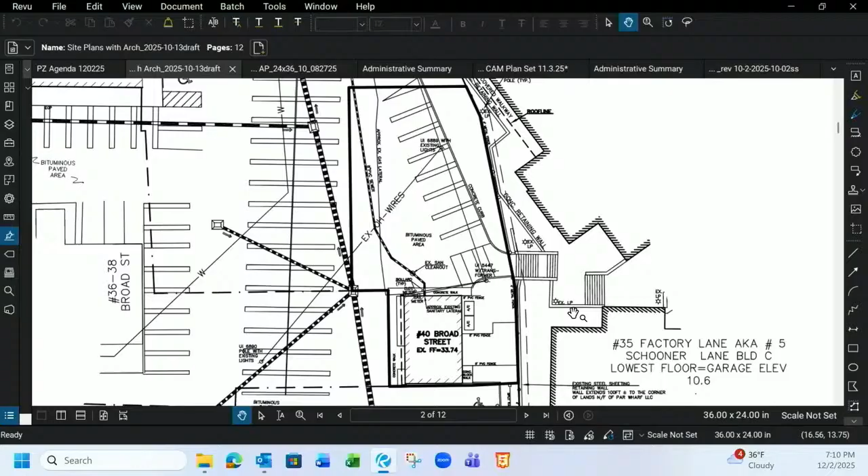So that's the sum of it, and happy to answer any questions. We did submit a request to have this brought onto your agenda tonight. David did put onto the agenda the plans, but these will be presented to you under a site plan application that hopefully will come at a later date.

Thank you. Are there any questions by the members of the board? Is the city attorney going to be making any comments on this particular application? If so, I'll let him speak to that. Thank you. Good evening, board.

As Attorney Lynch indicated, we met. If you might just give us your name. Jonathan Berchem, City Attorney, City of Milford.

So we met with Mr. Walls and Attorney Lynch. They showed us these plans. Obviously, the city's interest was the parking spaces remaining. Obviously, we benefited, the public's benefited by the spaces. Anybody that's ever been to Colony or any other of the businesses down there knows that parking's a premium down there, so we didn't want to lose spaces.

As presented by Mr. Walls and Attorney Lynch, obviously there's no loss in spacing. In fact, Attorney Lynch remarked to me they may be more desirable because should this project go forward, they would be covered. So the city's position is that this project seems consistent with MCDD and transit-oriented development, and for these purposes for 8-24, obviously there's no impact other than the period of construction with the municipal parking easement that the city obtained in 1979.

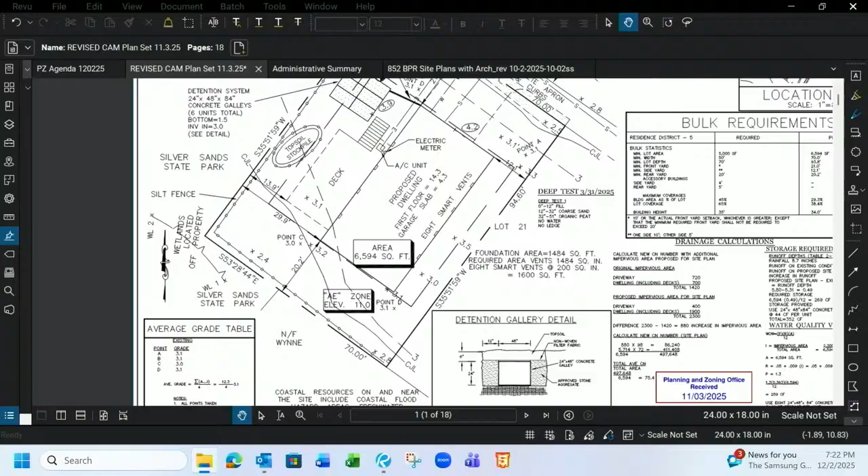We've gone through the process that we've been asked to go through. We went through DEEP, and we have approval from DEEP. We've gone through town engineering, and it seems like everything is in place. If there are any technical questions, I'm here with my builder, Victor Rosado, and Andrew Rosado, and our civil engineer, Fred D'Amico, who put the drawings together.

I'm here to answer any questions you have. Sure, thank you. Are there any questions for the board for Mr. Ruggieri? Mr. Hirsch? All right, I always ask this in these type of applications.

What structure, if any, is currently on the property? It's empty, there's nothing. The house is already knocked down? The house was taken down a year ago, October. We had a permit to do that, and it was hopefully right after we were going to build, but we ran into issues with zoning, and we fell below the threshold where we had to go to DEEP.

Did you have to go to DEEP because of your relation to the Silver Sands area? Correct. So this property, I know the area from the mapping a little bit. This is essentially between Long Island Sound and Silver Sands? Correct, I think it's near Maddox. Maddox is in the area? Yeah, we're on one of the little finger streets off of East Broadway.

Right, and a lot of houses being built there, as my understanding, is that they're being built on stilts. Correct, but I don't think, at least from what I saw, this house will be built on stilts. It will, it's piles. There are piles that we're putting in, and it's at elevation 11 feet.

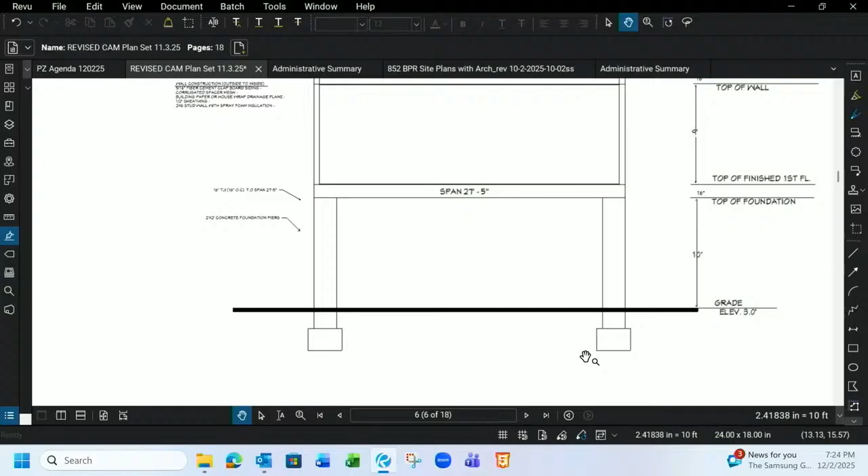And there's going to be a garage. Oh, there's going to be a garage? There it is, there's the garage. Okay, and so is that a one-car garage or two-car garage? It's a two-car garage. Okay, I couldn't tell.

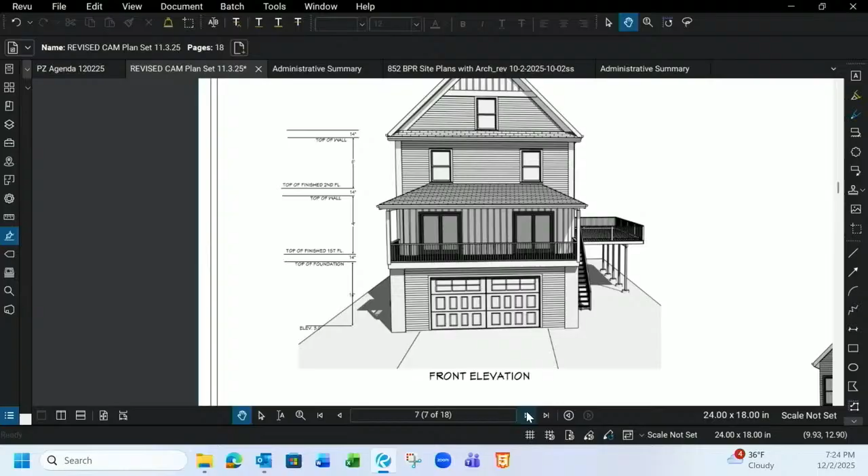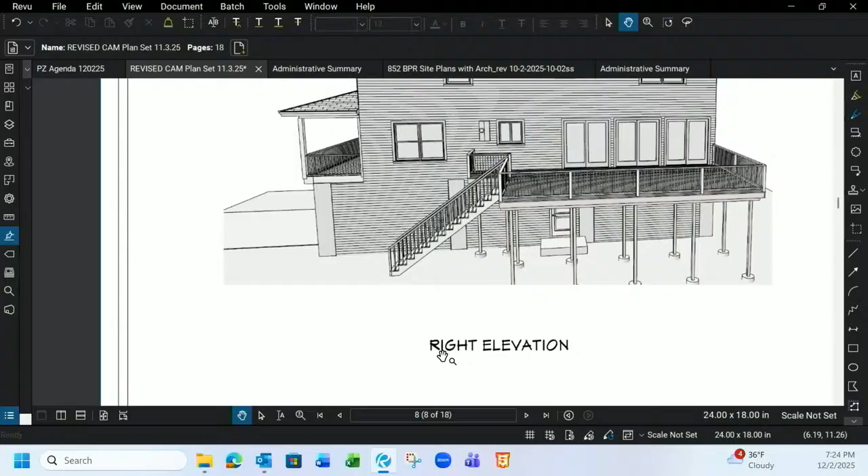And it looks like there's a means of egress and ingress on the side of the house. And is there a way, I assume there's a means of ingress and egress from the garage to the second floor living area? Well, coming off of the street, we're about 18 feet before we hit the garage. And to one side of the property, the left side looking from the front, we have 12 feet. And on the other side where the deck is, I believe we have 17 feet from the deck.

Thank you, any further comments or questions, Mr. Mortimer? For the record, any part of this structure approaching the wetlands in back? No. Okay, and from piles, I take it you mean helical piles? Yes, we're doing piles, yes. Okay, thank you.

Any other further comments or questions? Seeing none, Mr. Sulkus, can you give us the administrative summary please? The applicant is constructing a new single-family dwelling of 35 feet in height, replacing the existing dwelling that was previously on the site. The plans have been reviewed by the city engineer and DEEP, with recommendations from the city engineer to correct or clarify some information, which could be made a condition of approval. A license by DEEP has been granted to conduct work within the state of Connecticut's jurisdiction. No adverse impacts to coastal resources are anticipated.

Thank you very much, any further comments or questions after hearing Mr. Sulkus' administrative summary? Hearing none, this is a public hearing. Is anybody here in the public wishing to speak either in favor of or against the application before us? I see about 7 to 10 people here, nobody coming forward. Is there any reason to keep the public hearing open? Can we have this granted by assent? All members agreeing that we'll go to discussion.

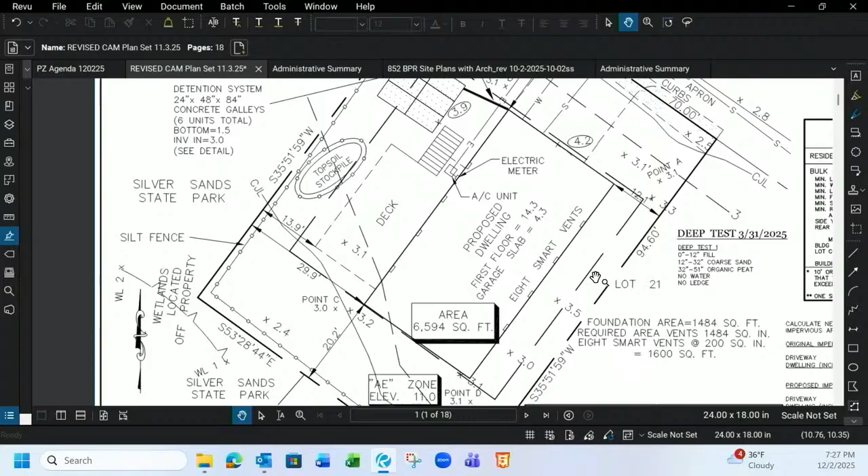I assume this is a high-risk flood zone, a VE or AE flood zone? Correct, AE 11. Are there any anti-flooding measures proposed to be built on this property to prevent flooding in the area? Any venting or piping? Yes, there's piping and drainage, and there's a dry well. I'm not sure the legal word for it, but yes. That site is in the front, upper left-hand corner. On the street side, you'll see a spot where drainage will go into, and that's a dry well of some sort.

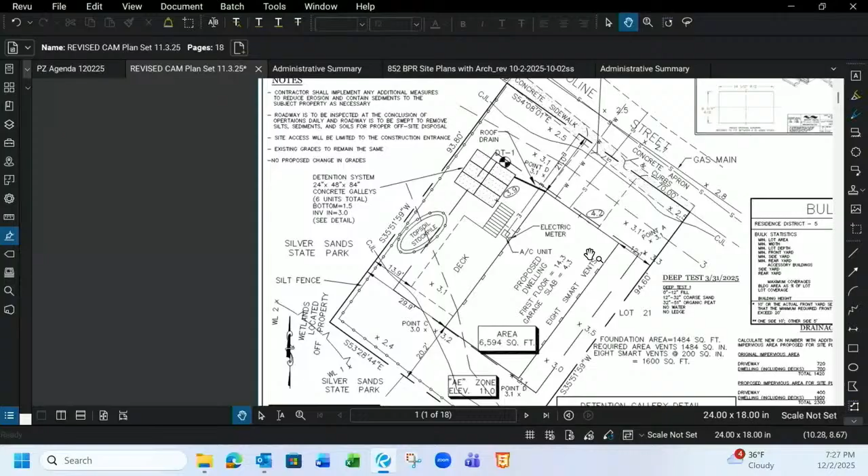Yeah, I just think, Mr. Hirsch, if my memory serves correct, we closed the public hearing by assent. Okay, I'm asking questions too. I understand, but the public hearing has been closed. You can ask a couple more questions. We were going to go to a vote. Okay, we can vote, that's fine.

Okay, I'll listen to a motion on 16 Carolyn Street then, please. Thank you.

I move to approve as presented the petition of Fred D'Amico for a special permit with coastal area site plan review on map 27, block 449, parcel 6, of which Maurice Ruggiero is the owner. Second. Thank you, we have a motion and a second.

Any further discussion on the motion? Seeing none, if you might take the roll call, please. I'm sorry, Mr. Chair, I just wanted to suggest that we amend the motion to...

...with the condition that the applicant adhere to the recommendations of the city engineer's letter dated May 15th, 2025. And that goes back to Mr. Mortimer. Would you accept the amendment as suggested by Member Alling? Yes, I will accept that. And do we have the same on the second? Yes. Thank you, so we have the motion.

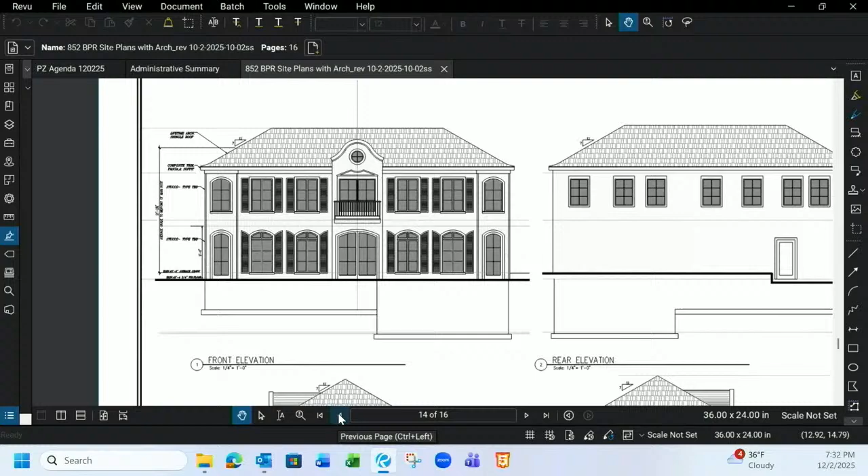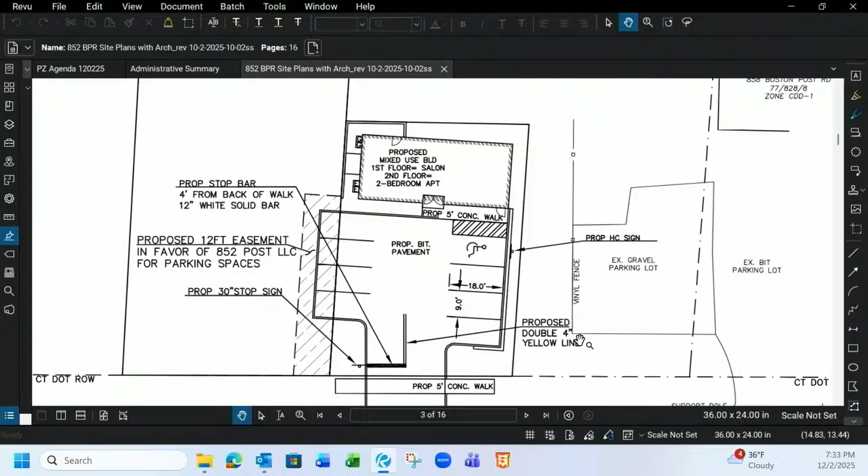The plans were reviewed by all the city departments. I hate to say it, but this is a pretty straightforward special permit application. It was reviewed by the police department with no problems. The fire department issued its memo last month. We had received approval from the sewer commission back in '22, so they administratively approved the revised plans. There's no inland wetlands involvement. And lastly, the city engineer gave his review.

It was pretty standard language that Mr. Podleski put in there. He made recommendations, or at least emphasized, that unless waived by the city public works director, sidewalks and curbs would be required, which we certainly adhere to. Also, Ron Wasmer, who is here with me tonight, did the site plan. The site plan was amended to provide for a handicap space. Other than that, I don't think there's much Ron needs to add. Again, this is just a revised plan that was previously approved. The building was just reconfigured. Happy to answer any questions if you have any.

Do you have any questions from the board? Mr. Hirsch?